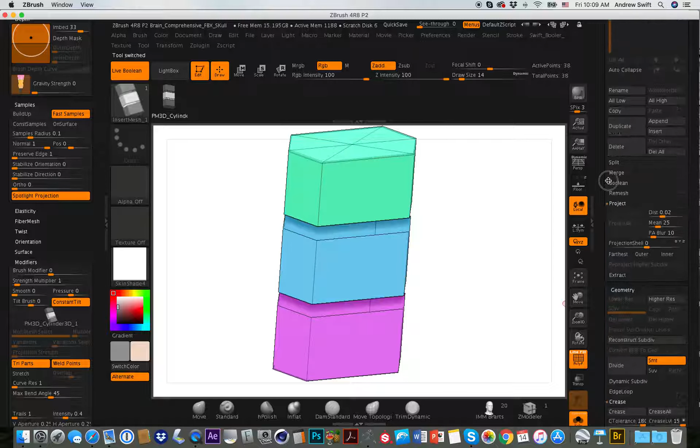I gotta remake it. All right, so I'm going to show you how to draw this curved shape out over an object like this. It's really good for drawing nerves, arteries, and veins. What you're going to want to do is make a shape like this, straight up the y-axis. Okay, I mean straight up the... Is that where it is? It's actually, yeah, it's up the y-axis, like this, and you're going to look at it like this.

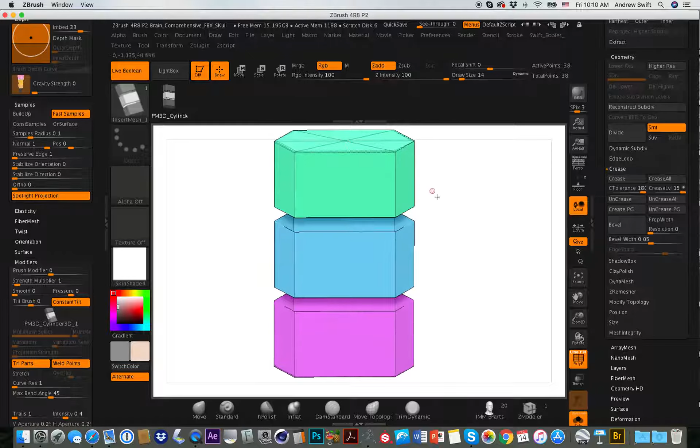I crease the ends, and the reason I did that is, if you go back to the other one, I'll show you when we get over there, but basically you need to crease the ends, and you do that by selecting just the polygons at the top and the bottom, and hitting this button, crease. The only edges you want creased are at the top face and the bottom face. All right, so with the model like that, the mask cleared, you're going to go create insert mesh, new.

If you wanted to append it, you can do that. And then back here, when you're on this other model, you're just going to draw it out. And it comes out like that. It's important that they have separate polygroups. And then you're going to go under stroke and set curve mode. You can leave that alone. Go under the brush settings. Leave the depth where it is for now. Tri parts is clicked, weld points.

And so now, when we draw this out, we get a curve like that. And the curve is based on the brush size. So if I change to a larger brush, see this curve is still active, this black and red line. If I click on it now with a larger brush, it will update the size. Does that make sense? So let's do that again. And then you can save this brush, and you only have to make it once. You can share it amongst your team members.

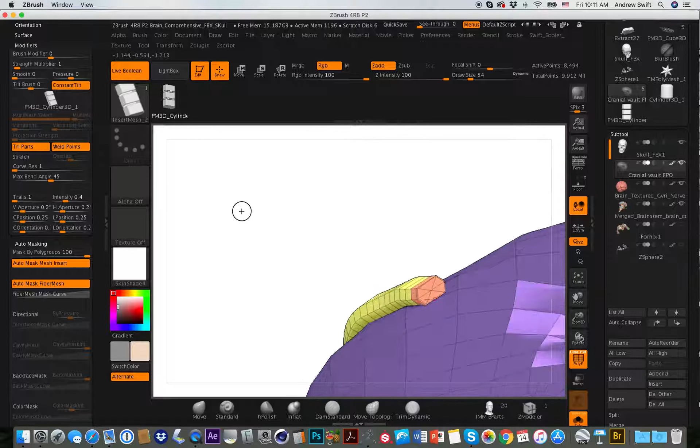All right, and you can see it's sitting nicely on the shape. If I wanted it deeper, I could drag this deeper like this, and then click back on it, and it would set it lower and also higher. And that would make it hover. And so I think we want something about like that. And this brush stays active. Again, you can change the size, and you can also move it around.

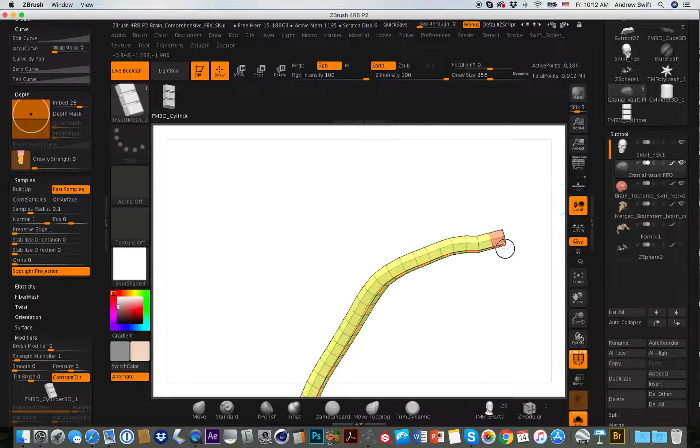The moving it around part isn't the most useful, I don't think, because sometimes you can drag it like that, but usually you drag it up, and it will snap. It's supposed to snap. The most useful thing is that you can continue to draw on it. So before you click on it, see how that little red line extends beyond the brush. If you click there and then draw out, it will continue to draw the brush.

All right, I pulled it up above the surface, see that little red line, and the brush will turn from red back to blue. And then you can continue to draw it like this. And this way you can draw all the way around an object. There are other tools for drawing circumferentially around an object, but those aren't terribly useful. So lots of times, like for drawing the facial nerve, I'll make a rough model that is only for placement of the nerves. And so let's say I wanted to make these nerves attach.

Basically the way you accept, let's say this is how I want it for now. You would click once on the model, and it would basically flatten that onto the shape. Doesn't work with subdivided models. So let's say we wanted this to now merge in. We had another nerve that came in like this. And let's say we want these to link up. All right, so let's say that's the problem.

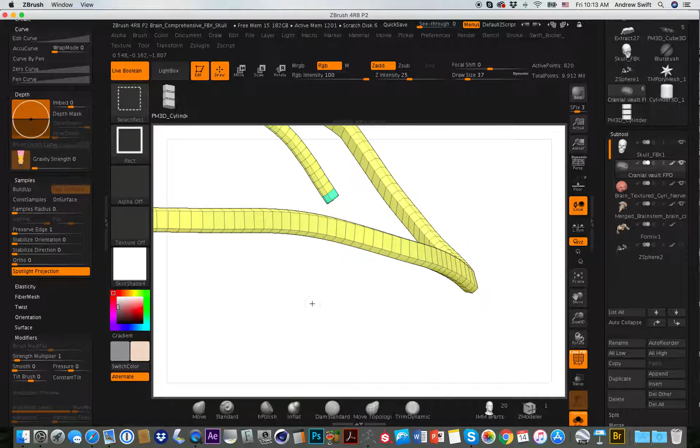All right, because this looks good. So I clicked once here and I flattened it down. It's masked everything else, and I deselect it. I'm going to delete everything but these two shapes. And now I'm going to come in here, and I'm going to bridge these together. And this is basically how I made the facial nerve in the other model. BZM will bring up the ZModeler brush.

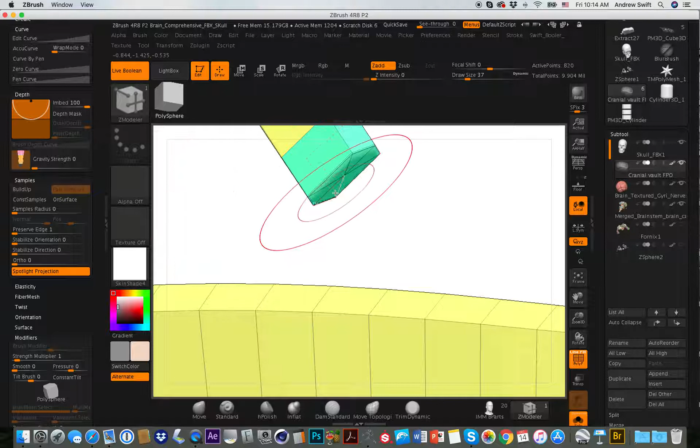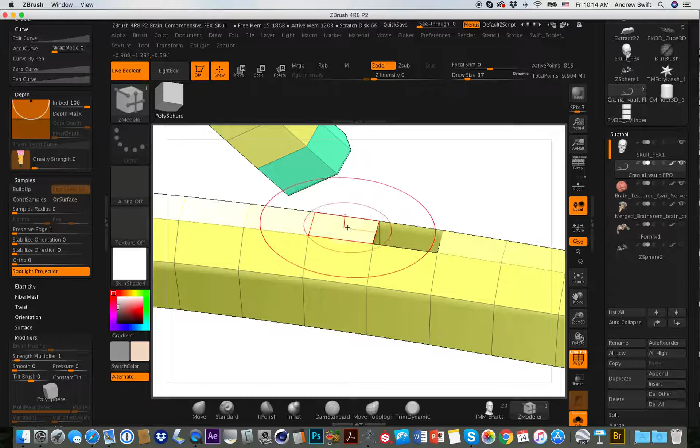And now I'm going to delete a single poly. Got that from holding down the space bar. I'm going to hold down Option key, click, drag, just to select all of them at once. And then I'm going to delete them. Now they're deleted. I am going to delete that, this, and this. So I have two open shapes. I'm going to hover over an edge, hold down spacebar, bridge, two holes. You can leave these at defaults.

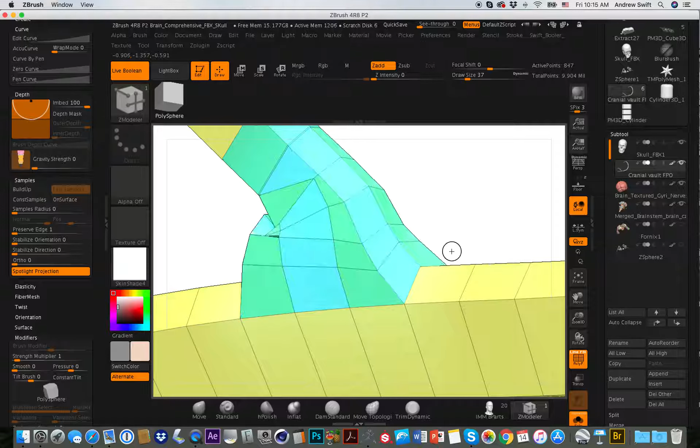Click, click. And if I drag up, I add polygons to the bridge. And if I drag to the right, it'll try to smooth it out. You don't need to do either of those things. This is fine, like that. And now they're bridged together. I don't want that creased, and I'll show you why. If I activate dynamic subdivisions, right here under dynamic subdiv, you can see the creasing does something I don't really want.

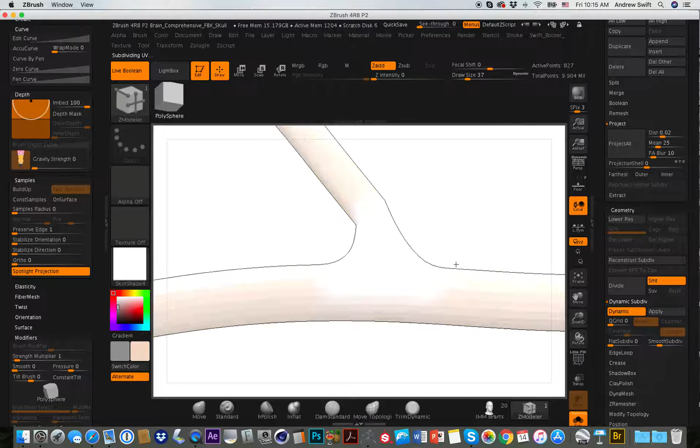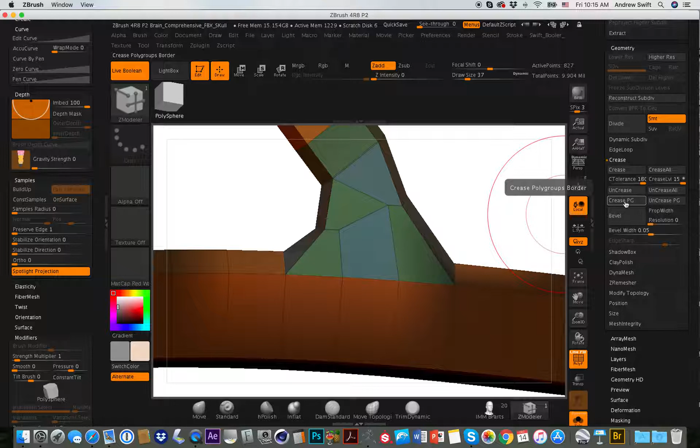MatCap Red Wax. There we go. You can see it's basically creasing it. You don't want that. So I'm going to select that, invert the selection, come in. I'm going to turn off dynamic for a second. It's hard to see on the video, I'm sure, but these little dotted lines here are what we want to uncrease. And I'm going to say uncrease. That didn't do it. So I'm going to say uncrease all for now, just so you can see what that will do.

Now if we hit D, say always yes. Right now it's much smoother. But that's how you bridge stuff together. That's how you use the curve brush. And that's it, I think. Okay.